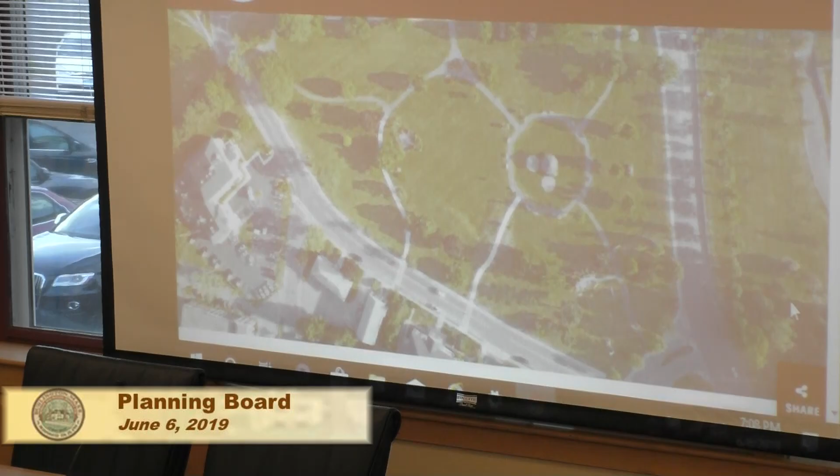So what we've done is redesign the front entrance, creating more of a park-like environment, and providing that the abandoned silos will stay non-accessible. One of them is in the midst of that green area to the left, and the other will be cordoned off with not a fence, but a guardrail. We have agreed with the Board of Health to work with them on a condition, which should be in your conditions, that the structural integrity reports work out a schedule to test those over time. Once a year, I think, would be reasonable to inspect them to make sure they stay in the current state.

The other issue was with respect to the trash compactor. We've enlarged that because we are now doing recycling. It doesn't change the visibility, the screening stays the same, but the pad is slightly larger. So that's just a change on the plan. Those are the major changes, and if you'd like, we'll take you through anything in detail.

Look, I'm not sure if it's necessary. I'll defer to staff.

So if you guys recall, at the last meeting I was underdressed than usual. I spent most of the time two weeks ago out in the field with the trustees. I was wearing jeans and a sweatshirt - underdressed, not under duress.

I was out in the field all day two weeks ago with Northeastern and the trustees, walked the site, literally with balloon tests, moving balloons around as to where the trees were going to be placed. We also talked about the changes here. Previous to that site visit, I was also out there with the fire department to discuss this change.

If you guys can put up the original plan on the bottom there for a minute - the original plan had circulation to the front of the building with an island circulating in front of it. The silo is right under that island. They were going to crush the silo, but it was determined that they'd rather keep the silo for its historical significance. With that, there was a lot of issue with the load bearing over it.

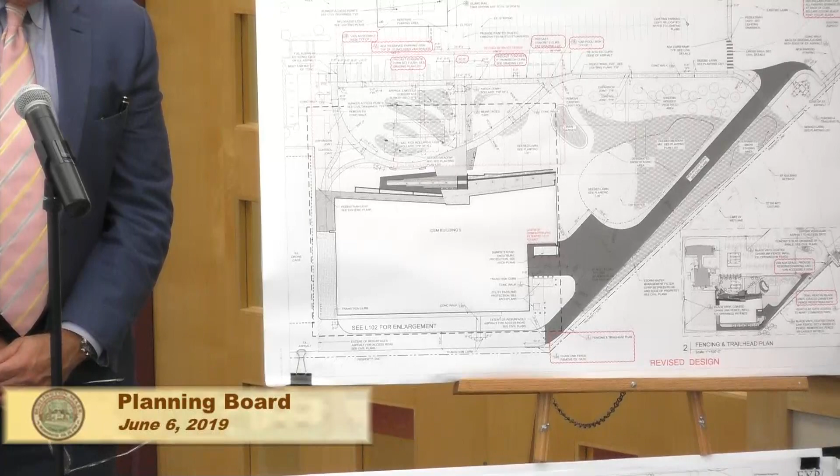The other changes are just a handful of minor shifts of things along the way that we've discussed, so kind of housekeeping to clean that up. Otherwise, we don't have any concerns moving forward.

We've recently had meetings with Northeastern, who brings a large group when they meet, to discuss these changes, and we've had close discussion with the trustees. The trustees actually just recently had a forum on Tuesday, which I know some of you attended, about their future plans for the park - unrelated to this, but it's been a good conversation with the trustees.

Other than that, we recommend favorably. We have a decision drafted for you, and as to the Board of Health comments, they meet on the 23rd to discuss this. We've agreed with the Board of Health and will incorporate all of their comments into the decision, but that means we won't be filing until after their meeting on the 23rd. We had a very good meeting with the Board of Health and agreed to all their conditions.

All right, thank you. I think I'm going to start down your end. Jack, do you have any questions? Yeah, I'm trying to figure out a minor engineering change - it has four pages of text associated with it. Is there an explanation of why there's so much, without me having to read it all?

We copied all the operational conditions. Is this what you're talking about, Jack? No, I'm talking about the well decision. If I may, Madam Chair - most of it's repeating, just restating what we did before. It's a code, in a sense - page 1 to 1.5 are related to the specifics, and the 2.5 pages beyond that are typical.

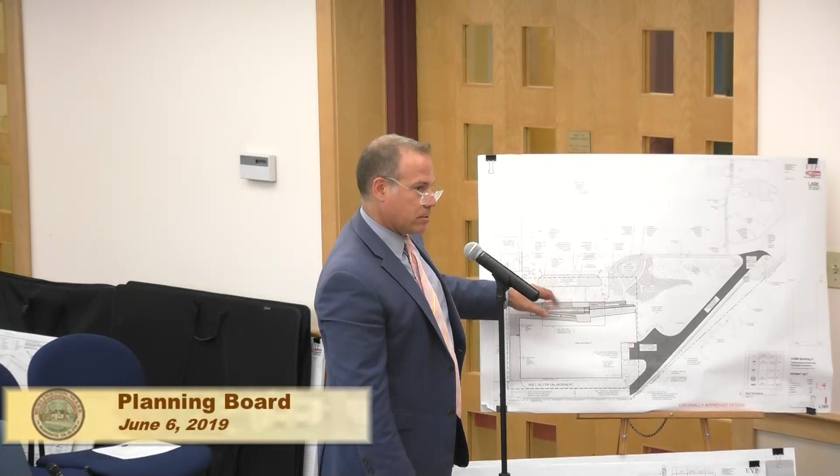This is the design that was approved about this time last year, where the drive aisle came much closer to the building with handicap spaces in this area here. A little bit hard to see on this drawing, but you can probably see it on the copy that you have. This dotted line represents the outline of the existing south bunker. And so as you can see, a portion of this drive lane and handicap parking spaces actually sits over the footprint of the bunker. So that's essentially the issue we were trying to address.

And so if we jump to the proposed, you see that the green space has been increased quite a bit. Any existing asphalt that was in this area is being removed. So now you have a pervious surface where you didn't before, so that's obviously a benefit.

And the parking in the drive is now shifted north to this location. Pedestrian access to the building remains essentially the same as it was before. The distance is a little bit longer. And this is also designed so that although the fire department will be staging from the rear of the building where the fire department connection is, this drive lane is wide enough and also has the structural capacity to support a fire truck. So they have the option of bringing a fire truck straight down here.

There are a series of bollards that protect this planted area, so there's no opportunity for a vehicle to drive on it or drive over the footprint of the bunker.

So, thank you for that. And so if I kind of lay one over the other, the handicap spaces are maybe 20 feet from the building or 30 feet from the building maybe, and now they're probably 40 or 50 feet, is that right? Approximately, yes. Yeah, so we doubled the distance to the handicap spaces.

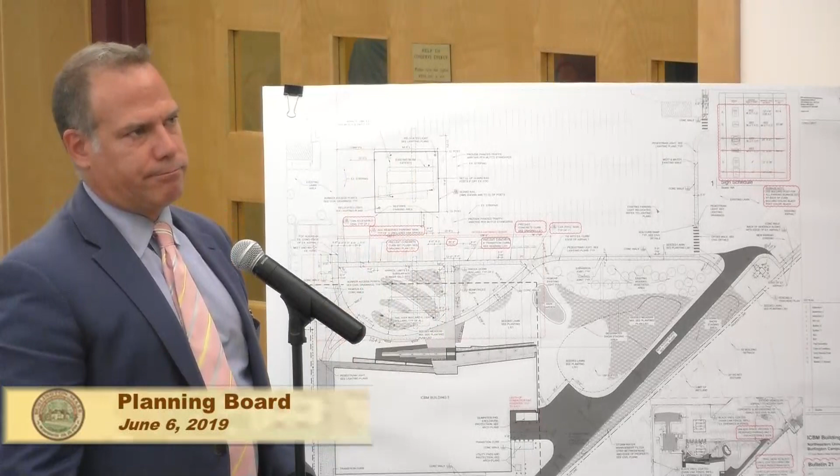There's an earth berm, if you're familiar with it. It's a long rectangular earth berm that essentially was the opening from the storage below with a raised platform up. So that berm is apparent here and will remain. With this area getting re-landscaped, that berm would probably be consumed in the new landscape and you probably wouldn't really see it.

Okay, so I guess the comment about you keeping them for the historic nature of them is probably not accurate, is that right?

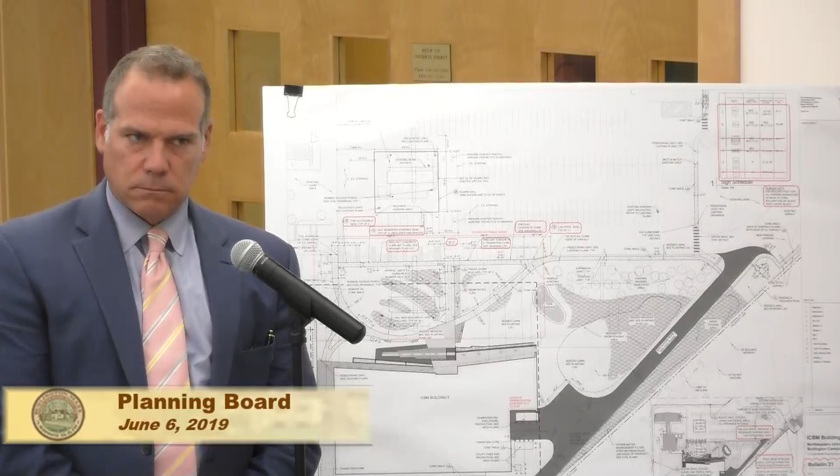I will say, I did hear it, and I did hear it when I was out on site. So whether - who'd you hear it from?

It's kind of, yeah. So what I would recommend, because I think it is very interesting about having the silos up there, and if you're going to keep them, I think it is historic in nature. Since you're keeping them now, would it make sense that you have a landmark and do some description on top of them - located here was the silos from the 50s, maybe a picture of it, here's what it actually looked like - into providing some type of informational plaque or something, because they will be secured.

Yeah, but it's closed space. I'd love to go down and take a look at one, you know what I mean? Was there any way to, by camera, create a viewing area for them? There's no way to even create a viewing area like that? They have a really far staircase that goes down.

Do some pictures and put them in the hall. Yeah, that's what I'm thinking. Like a plaque in the hallway, that's not a bad idea. And maybe locators too, so here's where they were, and then in the hallway - we actually do have some photographs from way back. Here's where they were, again, maybe rather than spend the money to remove them.

Well exactly, I mean it's small compared to what that. So I'm thinking maybe in the spirit of the sculpture parks and things like that, make it more a site of interest. If you put it on the Burlington website, here's where the Nike site is, go visit up there, you can see the site, you can see the commemorative areas of that. Although I think if there's pictures in the hallway explaining things...

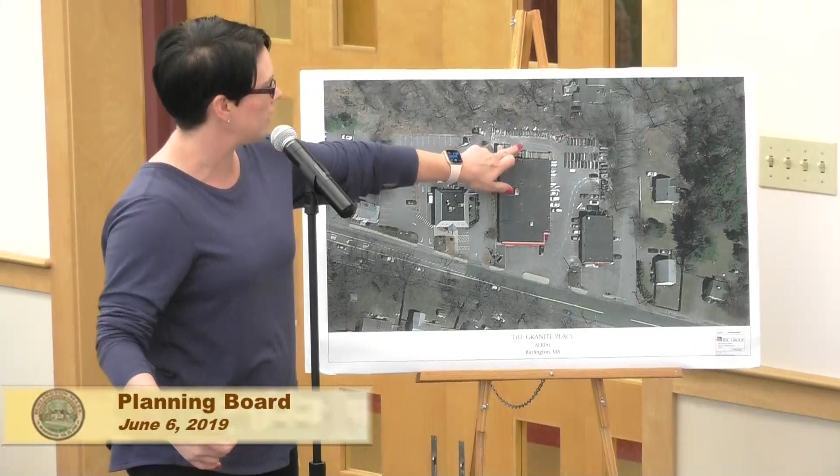So this is my property here, and the area I'm talking about, they had cleared an area between two trees, put down what looks like some gravel, and they were using a forklift to remove the granite they have stored back here. Instead of pulling it through this area, they've now started to pull it out here.

I don't know what they're doing with it, whether they're coming around the corner, I'm not really sure. The issue is there's a school bus stop right here for 5-year-olds. There's a family here with children who go on the school bus. My daughter goes on the school bus. This is an extremely dangerous corner without any commercial business.

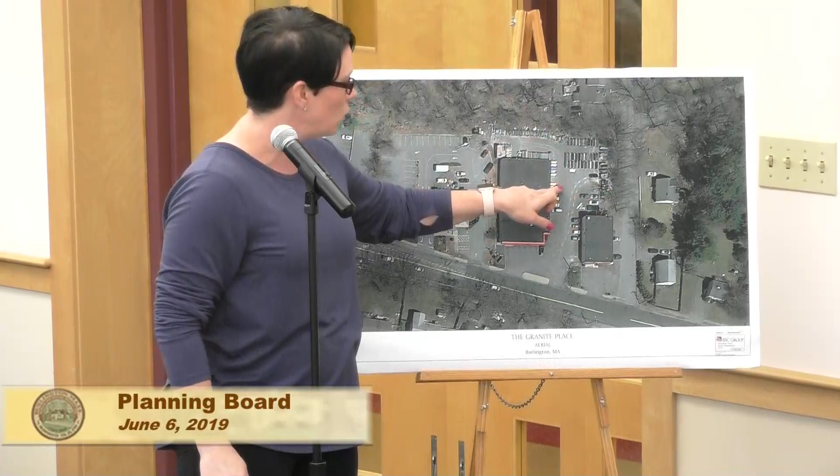Pulling a dumpster, pulling material out onto this road is a problem. My middle schoolers and high schoolers get dropped off at the end of the street and walk right down here. If you're coming down here, you cannot see coming around. So if there's a forklift or whatever apparatus they're taking, you can't see it. It's a safety issue for us.

On the permit we saw, they were looking to put up a fence and lights, which we would actually welcome in the area. Our big question, my husband's and mine, is where along this perimeter will the fence be going, and what kind of fence will it be? Because it could potentially detract from our property's value.

And the light, I haven't seen a lighting plan. Are they on a timer? Where are they going to be flashing? I'm not really sure, we haven't seen anything like that. Those are our residual concerns.

Okay, thank you. We will make note of those so that when the applicant is back before us, we can specify things about lighting, the fence design, and the materials as well.

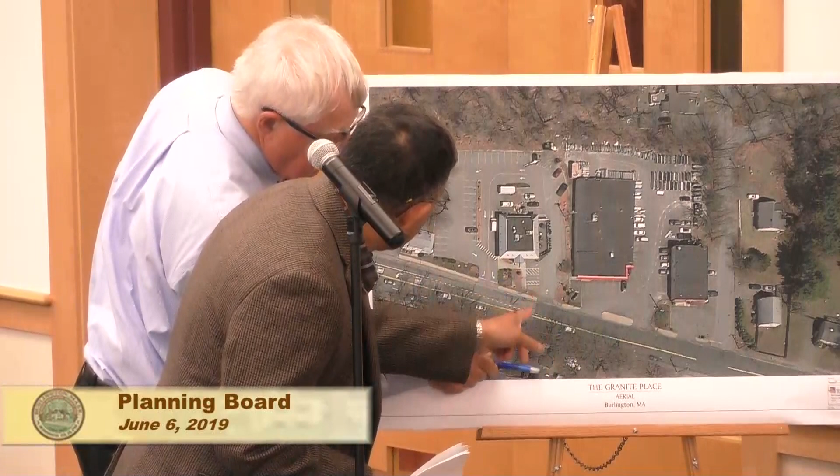Can you point out on that aerial view where you live? Yeah, so this is Cambridge Street here, plus this, maybe across the street? Yeah, that's yours. Okay, thank you, sir.

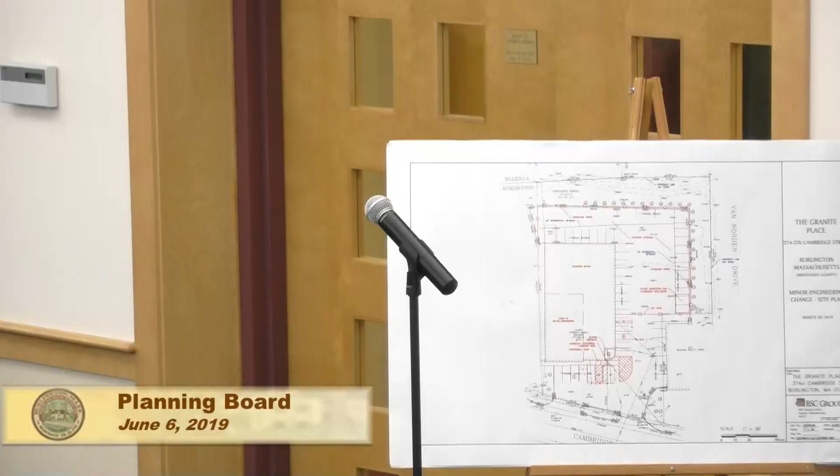Does anyone else have any questions? Can you tell me how long you've been there? Since 2013. And you said there was a granite place similar to yours before that. Yes, nearly the same size of operation. How long had they been there, do you know? 2007 or 2008.

Thank you. All right, I think we should continue this to the next meeting. And in between, I think we should schedule a meeting with people from building, from planning, so that we can iron out some of these problems.

And one other comment, in the meantime, I feel like somebody needs to communicate with the neighbors and see what's going to make them happy, if you're going to continue through that process -- I'm not saying you should because it's a cease and desist -- but the point is somebody's got to communicate with the neighbors and ask them what would make them happy going forward. For now, you need to cease and desist.

Madam Chair, our next meeting is on June 20th, but I'm wondering if they're looking for some type of subcommittee meeting and other things -- would you be ready by June 20th? That would be tough to do. If we're trying to get to talk with the folks in town, the subcommittee, and the neighbors in two weeks, that may not be enough time.

I think you're right, perhaps we should make this the July meeting. And you should consider appointing a subcommittee if that's the case. We should definitely have a subcommittee. So the July meeting is July, what is the date? The 18th.

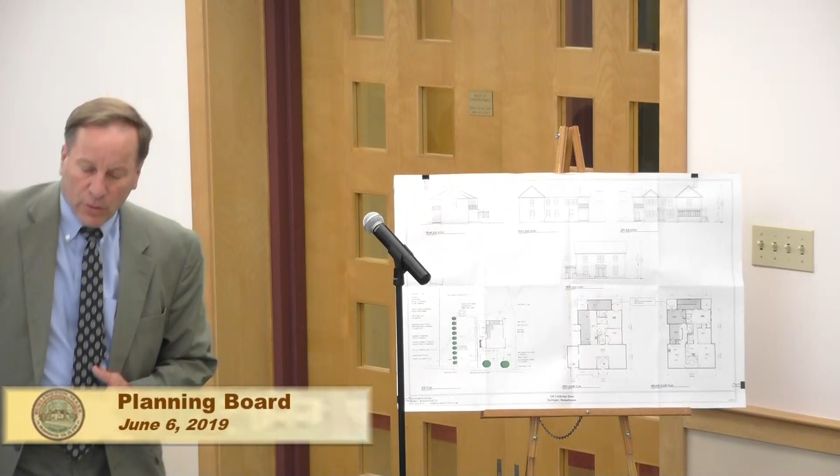So that's the only change to the plan that has been put forward. We've pretty much discussed the project itself over the past few meetings. Happy to fill in any information you might need or answer questions, but again, it's a special permit, and I'd submit that the plan as is will certainly not make the area any worse of a nonconformance than it currently is. I'd suggest it's a pretty good improvement. So with that, Madam Chair, I'll entertain any questions.

Okay, thank you. Kristen, would you like to weigh in? Sure. So we began this without a sidewalk, without any drainage, with a couple of different plans for the parking lot, and with less vegetation. So I think we've come a long way from the beginning of the site, and from what we see now with the sea of pavement in the front.

So it's always good to preserve the historic building. There is an addition in the back, but really the front of it will stay as it looks, with this historical look to it. The front of the site will have a walkway.

Is the walkway paved coming in? It looks paved in the plan. It's actually going to be brick - brick walkway coming in. They've agreed to a cement, 5-foot sidewalk with vertical granite along the front, similar to the neighbors who are also putting in a sidewalk. So you'll have a continuous sidewalk from here all the way to Wilmington Road, which is fantastic for the area.

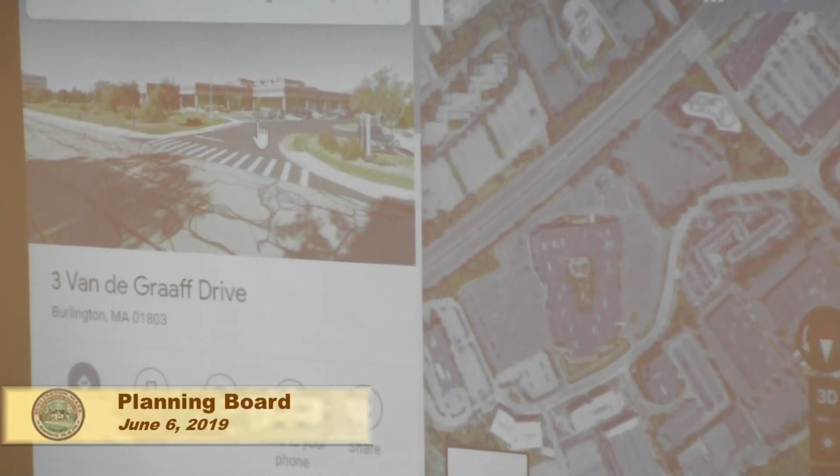And in order to go to the marketplace in terms of the broader approach, if those who attended the forum held before the adoption of the Biotech bylaw amendments, your consultants or the panelists indicated that it's best to be in a position where it's totally permitted, because you're going to have to review whoever comes in, and the Board of Health's going to have to review whoever comes in. But to go to the marketplace and say the town has weighed in on biotech and would view this as an appropriate location for biotech or biopharma enhances the marketability of the project, of the property.

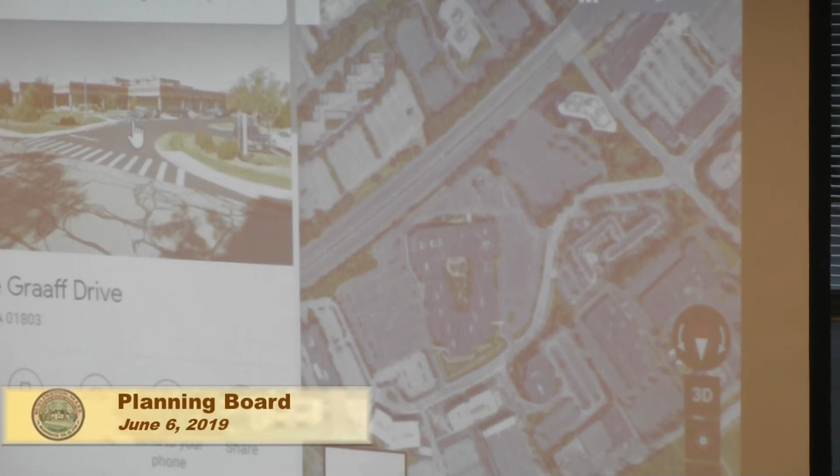So basically, it's a special permit that allows the use. It's subject to the Board of Health regulations and review. I don't think we'd want to do anything more than Level 1 or Level 2, which is basic research.

But if you're trying to go to the marketplace and attract tenants in a rather competitive market, particularly in biotech, to make them migrate north out of perhaps Cambridge, it enhances the prospects. The reality is, if they were to come in and make any changes, we're going to be back before you, but it allows us to go to the marketplace. No exterior changes, nothing being proposed.

Thank you. Kristen? Sure. So this is our first application under the new bylaw. But we did, if you recall, process a laboratories engaged in research and biotechnology permit, written a little bit differently, for 4 Burlington Woods maybe 6 months ago.

For the same, and that was our first kind of blanket life science lab use permit. So how we've written it, put the conditions together, this permit in no way negates the responsibility of the applicant to go through the Board of Health full process when the tenant is identified. This lays out some of the basic laboratory conditions that we have in town.

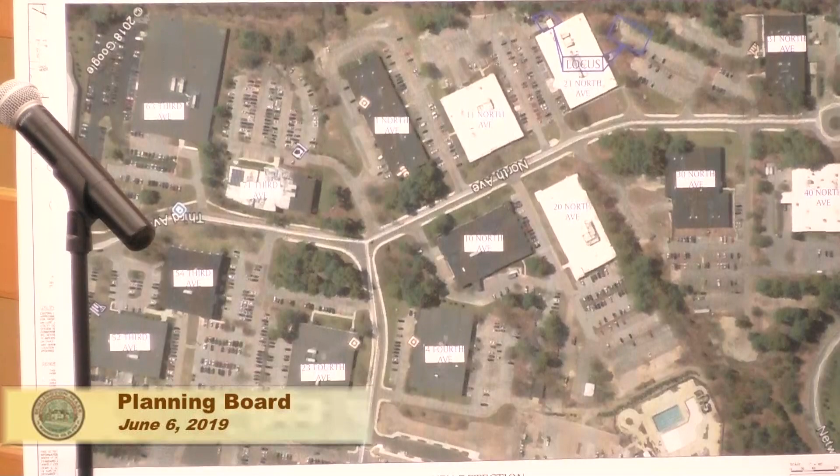There is an outdoor area where they're talking about having a fenced-in area where they would do some beta testing of security research and development. This would be an area where they would do beta testing only for scanning devices, scanning operations that would ultimately be used for surveillance technology. But there would be no formal testing taking place in there of any actual contraband or anything like that.

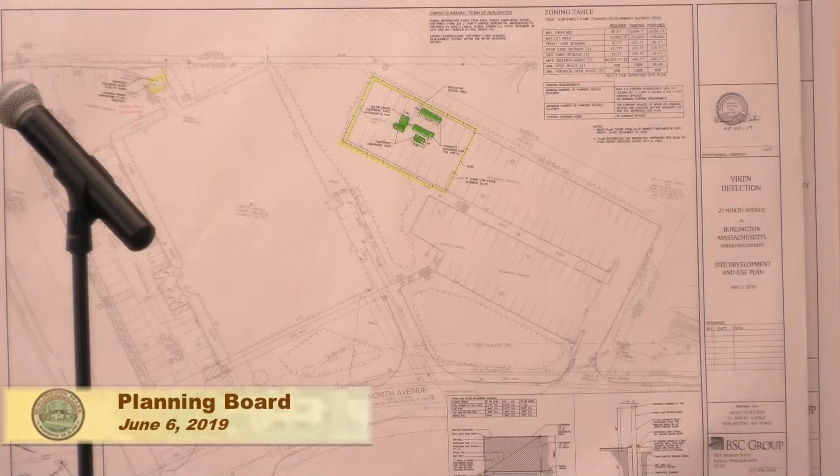So that's the area highlighted in yellow that would be fenced in and separated off. They would still comply with all their parking requirements even using that area as shown. So what I thought might be helpful, in the interest of time, I could have Frank briefly walk through the plan, and both Peter and Jim are here to answer any questions about their operations.

But before we do that, at the risk of keeping everyone here a little bit longer and missing more of the hockey game, Joe and I had the benefit of meeting earlier today and learning a little bit about your business. I think it would benefit the rest of the board if you could give us a brief summary of what it is that you do. I found it very interesting. I think everyone would like to know more.

We started in handheld X-ray technology, so our first product was a lead paint analyzer used to detect lead in paint. We developed a system that could detect it at much lower levels. Through the Flint, Michigan crisis, it was found that lead is very dangerous to children, even at very small levels.

We won a big award with the city of New York and helped them. Mayor de Blasio was holding up our instrument last month at a conference. But the product we're really excited about is a handheld X-ray imager that we've had out in local law enforcement to find drugs and traps in cars. That product has been revolutionary to law enforcement over the last year. We've found millions of dollars in seized cash and tons of drugs trafficked on our interstate highways.

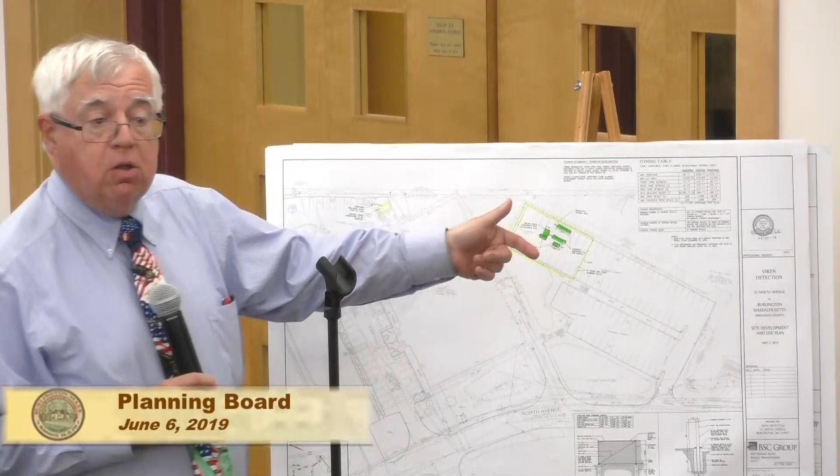As I understand it, there are 2 components of this system. There'll be pylons here where a vehicle can be driven through, so they'll get the horizontal and vertical. And then there'll be a ground level component that can shoot up underneath the vehicle itself, so they can get basically all sides. There will be 2 small storage sheds, and there will be some utility connections to the building so they can transmit. That's basically all the site work.

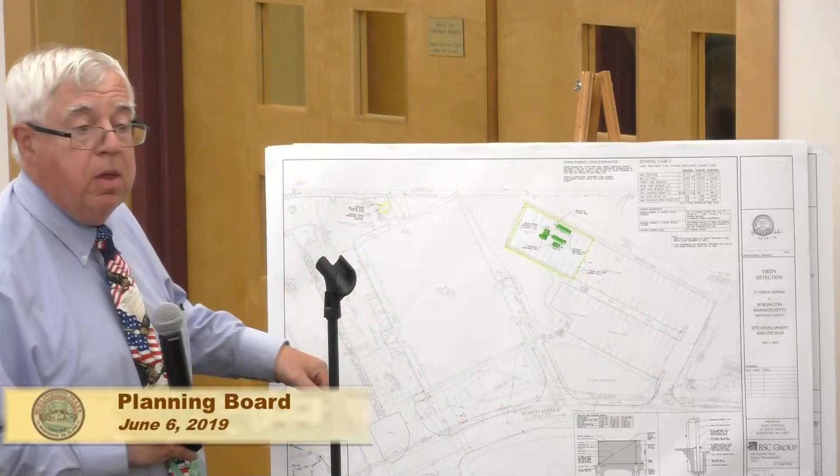There's still plenty of parking. You can see in this area here. There's parking on this side of the building as well. They have shared parking along this area. So again, that's basically it, folks.

Okay, thank you, Frank. That was less than 5 minutes. Yeah, it's quick. Working on it, you know. Kristen?

I'm all for adding all these cool companies that are in the news, and we can say, hey, they're in Burlington. I don't really have very many comments, other than, so I'll start from the beginning.

I did have a question for the board just on the fence, and based on some of our past discussions, I wanted to make sure we discuss the fence material, but also make sure there wasn't barbed wire or anything else on the fence, which is not friendly to pedestrian areas.

Also, just to revise the parking table to include the lab component of the building, restripe the parking, repair any of the site - it's in okay shape, but I just want to make sure they do an analysis of the curbing, especially around drainage, so the drainage is working as it's supposed to, and repair any broken curbing within the site.

And I didn't drive by there, but I did Google Earth it, and there's this big, huge mulched area in the front. Is there landscaping in that now, or is it still just a big circle of mulch?

It's a wildflower planting that we put in at the end of last year, so there should be wildflowers growing. I mean, it's like the size of a giant pool, but it's just mulch right now. So, okay, if there's something there, we just wanted to enhance that frontage.

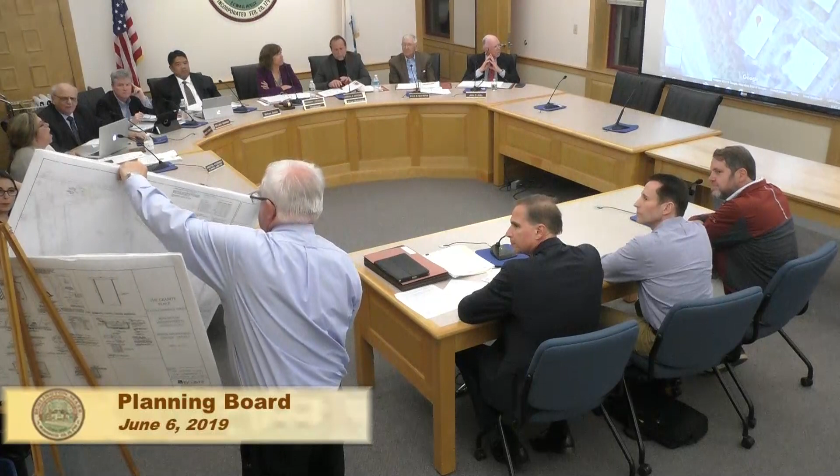Is that uphill or downhill? I don't recall. It's where the arrow is, do you see the arrow there? It's visible literally from Route 3. Okay, so that blue area right there is where we'll be putting in that fenced in at the end of the parking. Okay, so that is correct on the Google map, yes.

Okay, other than that, no, I was just looking at your website, and I would urge some people who are interested - it's very interesting.

Thank you, Kristen. Bill? Yeah, thank you, Madam Chair. I guess on the fence material, where you're alluding to is a chain link with the green slats.

Typically over time, your green slats tend to lose it, so we're looking for different materials. Is that your suggestion, Kristen? My suggestion was, because it turns out to be crappy in five years, slatted chain link fences are not usually our optimal, preferred, but it's in the back of the site. No, it's up to you guys.

What's the option? What's the better option in your opinion? It's a vinyl regular fence, white stage vinyl, black vinyl, 6 foot stockade, anything vinyl is good. I'll leave it up to the board, but certainly not chain link with the green. It had come up as a question, so I wanted to raise it for the rest of you. I would let the rest of the board comment on what materials they'd like to see there instead of the chain link with green.

My question here is going from the building to the back of that parking lot, is there currently a walkway there to get there versus going out the street and around and back and in? I'll let Frank answer. What's the plan for that? There's no formal sidewalk from here to this point you're talking about, behind the building?

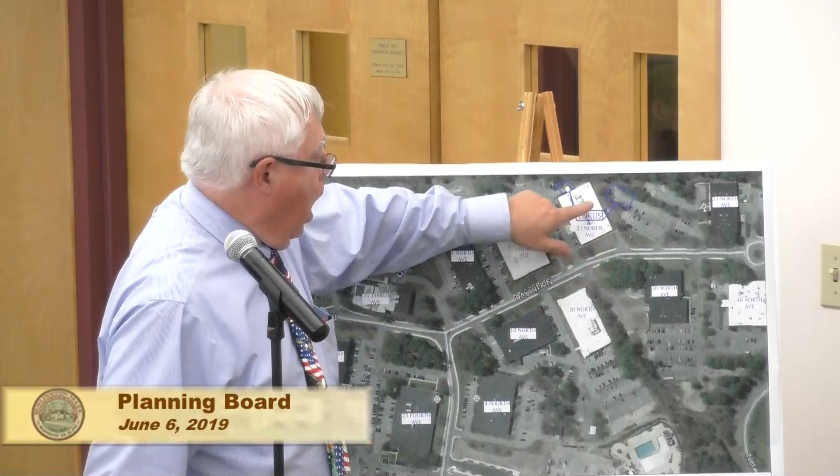Well, what's the access from, how the employees are gonna get from the building and then over to the Beta area? There'd be access here, and then on this side to the rear, there's access all along this area. Okay, so I guess my question is, what kind of access, are they tromping through the woods, is there a gravel path? Let me make sure I understand your question, Bill. So there's not access from here to here. There's access into the building on this side, and there's access on this side of the building. I guess you'd go through the building.

I don't think people would want to walk all this distance. So let me try my question again. From the access to the building to the back to the Beta site, how is that? Is it paved, is it gravel? There is actually a sidewalk in that area. Thank you.

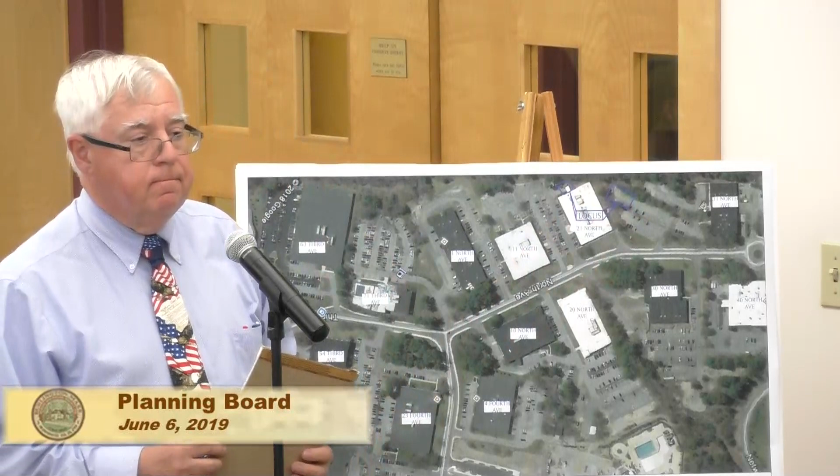And then just a question from a business standpoint, you've got the X-ray, which you talked a lot about, and then you've got that second piece, which is the XRF. It sounds like more of your business is on the X-ray versus the XRF side of things. Yeah, correct. Both, that's a handheld instrument. The Beta site would be more for the vehicle drive-through portals. So what percentage of that is probably, would you say 80% X-ray, 20% XRF?

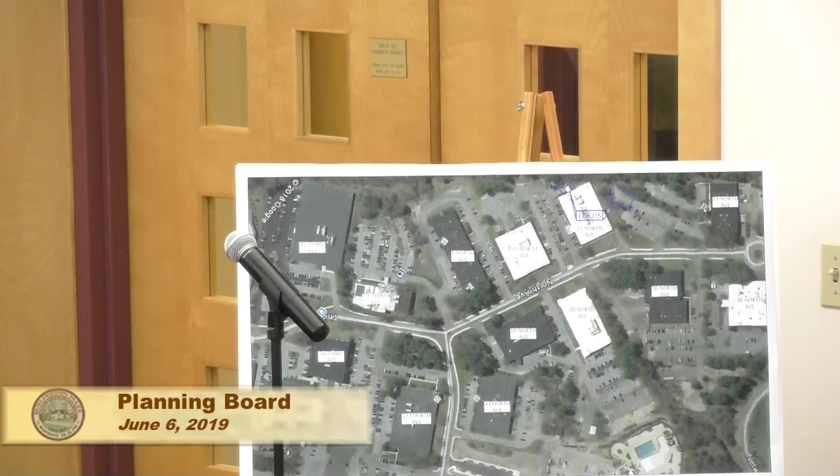Right now it's probably 60% X-ray, 40% XRF, but over the next year it's going to flip, and the other side's going down way towards the X-ray. Okay, thank you.

Welcome. Just a quick question, Madam Chair. Curiosity's sake, how far along are you with the vehicle scanning system? Is it close to implementation? Are you just starting on it?

Right now, our handheld is done, it's been out for two years. The vehicle portal system, all the subsystems have been designed. We have the parts, we're just working through some different technologies that we're experimenting with integrating into it, but we're ready to go, and CBP is very anxious to have us in there soon. So we're anxious to move in as quickly as possible. Thank you, that's all I had, Madam Chair.

A lot of drugs coming across the border. We want to stop that as quickly as possible.

I have a curiosity question too. Do your employees have to wear any protective clothing because they're working with the X-rays all the time? Yeah, anytime they're working around X-rays, they'll have a personal dosimeter, but other than that, there's safety built into the systems. How it works is there has to be a vehicle moving through it for it to be on, there's safety stops, so all those things are built into the system.

Our unique technology is called reflective X-ray, which is hundreds of times lower dose, which is why you can use it in a drive-through portal. The dose to a passenger in one of the vehicles is equivalent to a few minutes of background radiation, so it's considered essentially negligible. It's a very safe technology.